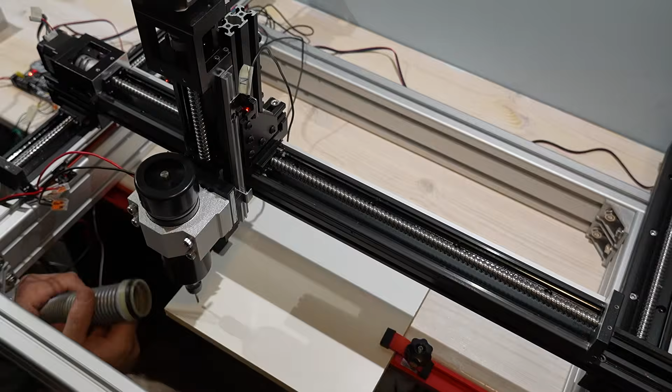Hey guys, the CNC is up, homed, and making clean chips. XYZ are dialed, motion is tight, and the sound is exactly what I want. In this one, I'll walk through how I wired the motors, set up the optical endstops and probe, and got the control stack running with Klipper Mainsail in a Docker container on Windows.

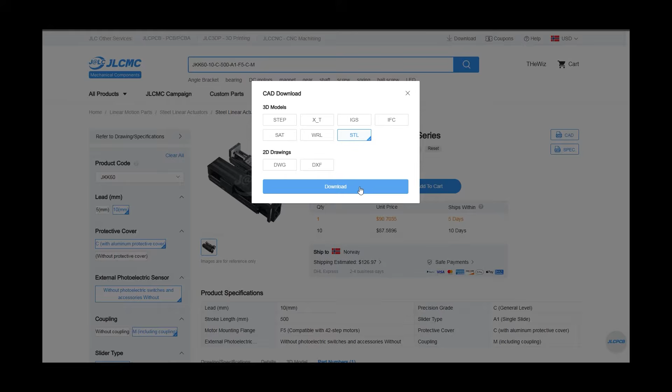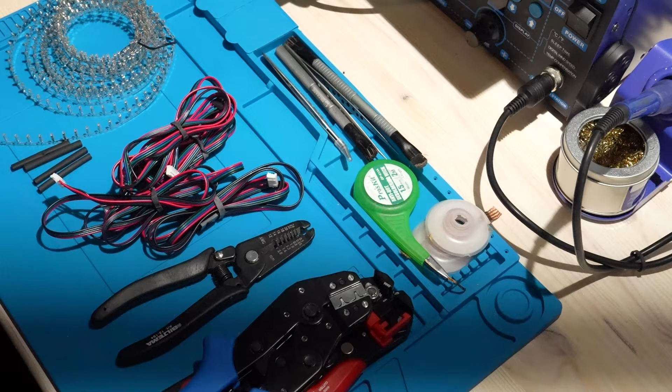Before we dive in, wiring isn't flashy, but it's critical. Do it right the first time, or the debugging later will cost you way more time. Label your cables, double check polarity, and give everything strain relief. Test every connection with a meter, even if you're 100% sure it's correct. A quick continuity check now saves hours of chasing failures later.

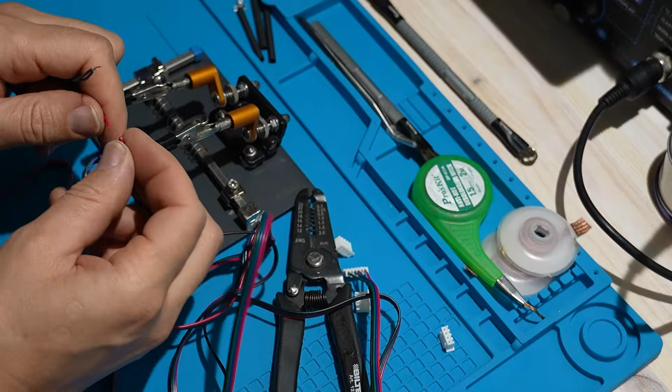The Y axis has 2 motors, wired in parallel to one driver. I don't plug the wires straight into the SKR Mini first. I crimp the pins onto the wires, then insert them into a 4-pin HSG header. That header clicks onto the SKR Mini E3 mainboard. I used to do these crimps with basic pliers. It works, like in my older PNP video, but the dedicated crimper makes it fast, solid, and neat.

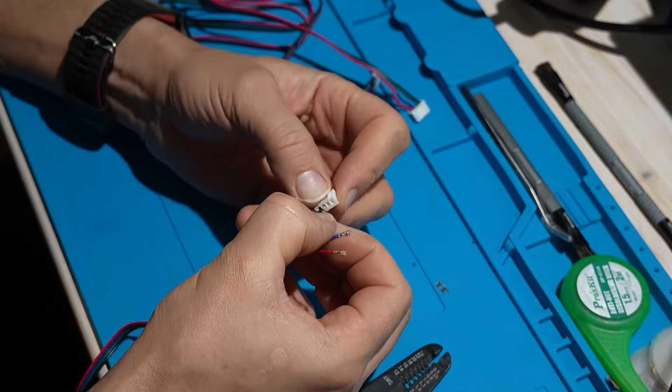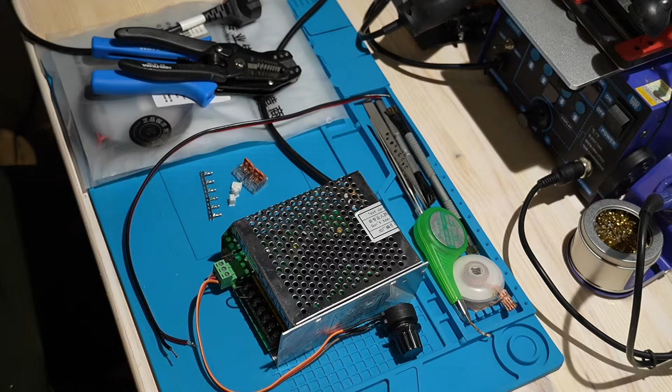Now the spindle power supply. I cut the end of a PC power supply cord and used it to power the spindle power supply. We connect live, neutral, and earth to the 3 AC terminals. Unplug the cable first and be careful here. This carries high current and can be lethal.

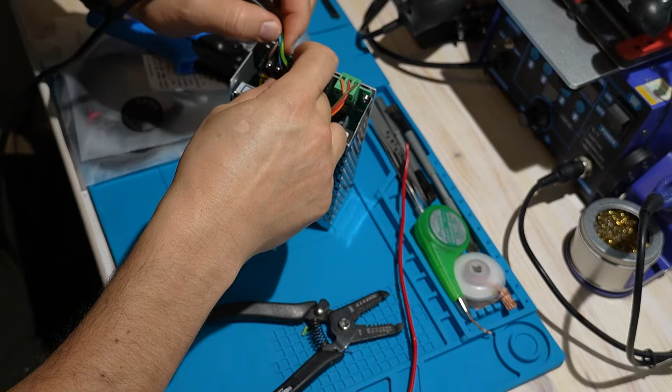After the wires are connected securely, I power the supply and test the motor lead polarity with a meter to make sure the spindle runs in the correct direction. Milling bits are directional. I also test the potentiometer. The current setting to the motor should be between 0 and 100 on this scale. Mine reads 110 max, which is okay.

We added Wago connectors at the end of the motor cables to make the motor easy to disconnect and reconnect. We will also replace the potentiometer with an adapter that converts the PWM signal from the SKR Mini to 0 to 10 volts, so the spindle speed can be software controlled.

First, I prep the cables. I crimp the pins on each sensor lead and snap them into HSG 2-pin headers, one per sensor for X, Y, and Z. The white wire isn't used, so I fold it back and heat shrink it for isolation. The brown wire stays parked for now. We'll come back to it later.

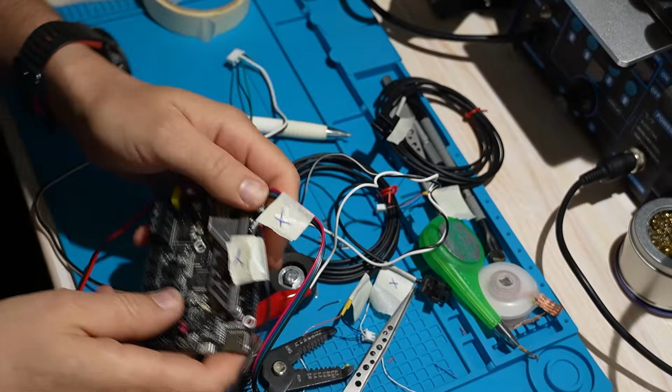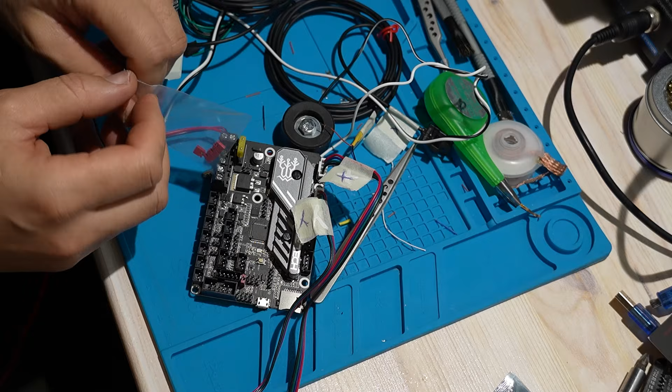Now we hook everything to the mainboard. Stepper motors go in first. Label your cables. It's really easy to mix them up. Keep watching, you'll see me make a cable mistake and fix it. To flash the firmware, I power the board over USB. I place the jumper on the board's power select pins so USB can feed it, flash Klipper, then remove the jumper so the board goes back to its normal power path.

Now the brown wires, these need 5 volts to power the optical sensors. I bring the brown leads together and feed them from the E-stop 3-pin header's 5 volts on the SKR Mini E3. For the Z-probe, I'm using PC14 and GND on the 5-pin header. The 2 extra pins on that header are reserved for the PWM control we'll use to run the spindle from Mainsail, and that's coming in the next video.

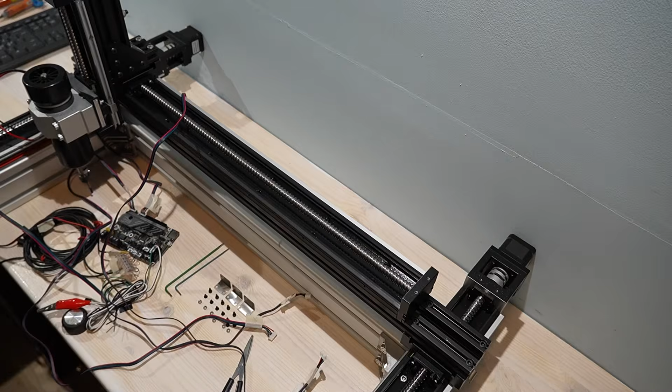Now I connect all the cables to the motors, and this is where labeling pays off. These linear rails include a smart bracket designed for the optical sensors. I really like how they're made. Easy to place, easy to slide for fine adjustment, and they lock down solid once the trip point is right. This cable setup is temporary. I'll add cable chains to guide and protect everything. For now, I'm doing my best to route cables away from all moving parts, but this is not the final safe solution.

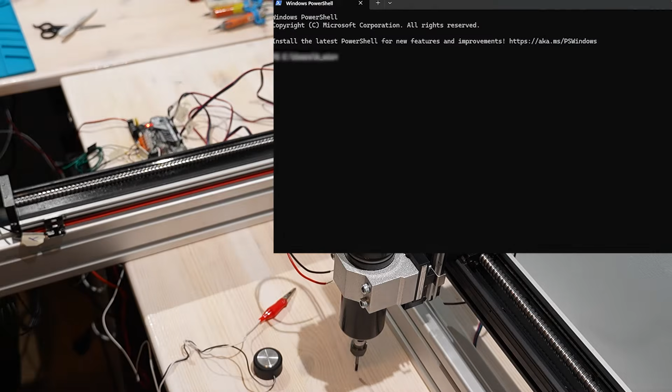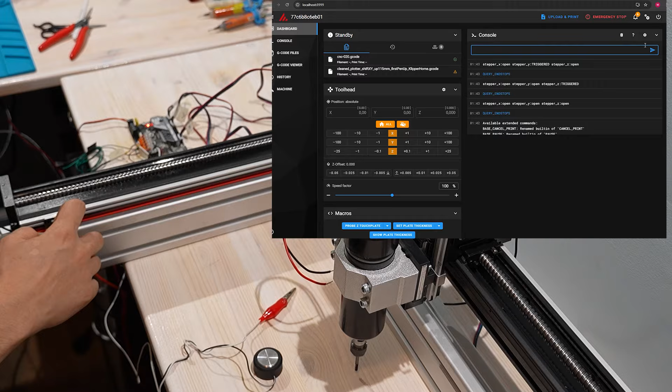Now a little about software. I'm running Klipper, Moonraker, Mainsail fully in Docker on Windows using WSL2. The board is passed through by its /dev/serial/by-id path, and Klipper and Moonraker share the same /opt/printer_data, so configs live in one place. Mainsail is at localhost port 9999. Moonraker is at localhost port 7126.

To start the stack, I just run docker compose in the project folder. If the board doesn't show up, I reattach it with usbipd and it's back. I'll put the full folder structure on my GitHub soon, so you can drop it in and go.

Why containers, you may ask? Because it makes the setup portable and predictable. I can move this CNC to any PC, shop computer, or laptop by copying one project folder and running a single command. No driver hunts, no broken paths, and all configs stay together. If the board drops, I reattach it with usbipd, restart with docker compose up -d, and I'm back online in seconds.

To secure my test piece, I mounted an aluminum T-track under the CNC frame and fixed it with T-slot fasteners and M5 bolts. For the MDF board I'm using as the test workpiece, I'm clamping it with 2 quick-acting T-track hold-down clamps. That's enough for this test.

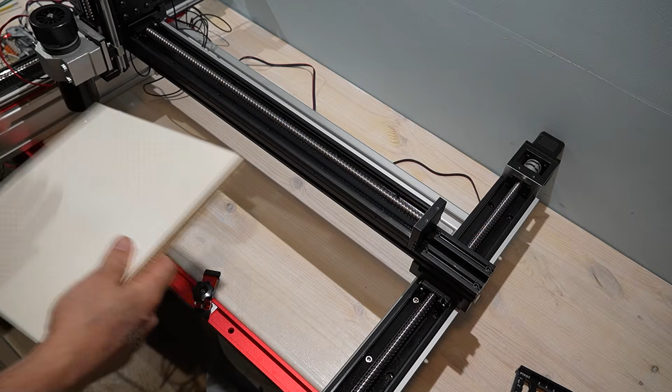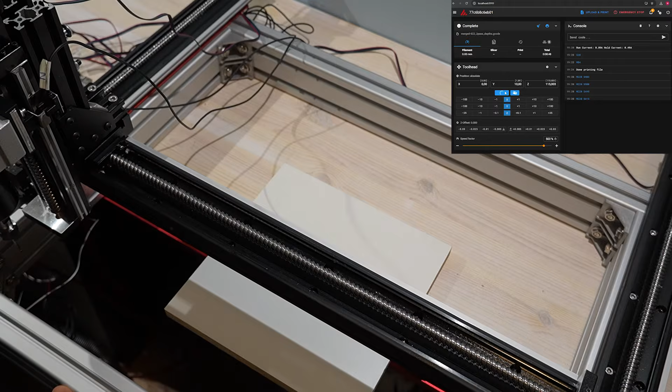Now I home the machine, move the spindle over the workpiece, and zero X and Y. Then I probe Z, load my G-code, and hit run. Voila, a working CNC.